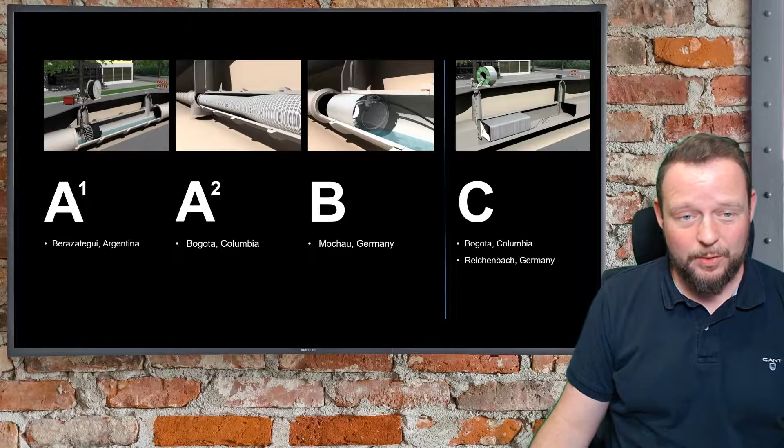And this finally brings us to our case studies about spiral wound lining technologies. And we do have 1, 2, 3, 4, 5 case studies. So for all different types of spiral wound lining technologies, I can give you at least one case study. There will be also some videos, but also some information from my side.

So let's start with A1, where we had a project in the province of Buenos Aires in Berazategui, I don't know how to spell it right. The pipe itself is about 120 years old. It's a circular shape with different diameters, but 2286 was one of the bigger diameters, and the total length is 600 meters. The liner ID chosen is 1800 millimeters.

So there was a HDPE liner installed with the Sekisui SPR-PE technology. And the host pipe condition class according to DWA is A3, since the pipe was already partly collapsed. And we also had a very high water level during the lining works. So these are somehow the big features of this project.

Regarding the hydraulic capacity, we had the flow capacity of the host pipe of about 11.3 cubic meters per second to about 14.2 cubic meters per second. This different flow capacity is because of the different diameters of the host pipe from 2100 to 2286 millimeters. And after the rehabilitation, we do have an increased flow capacity of 16.6 cubic meters per second.

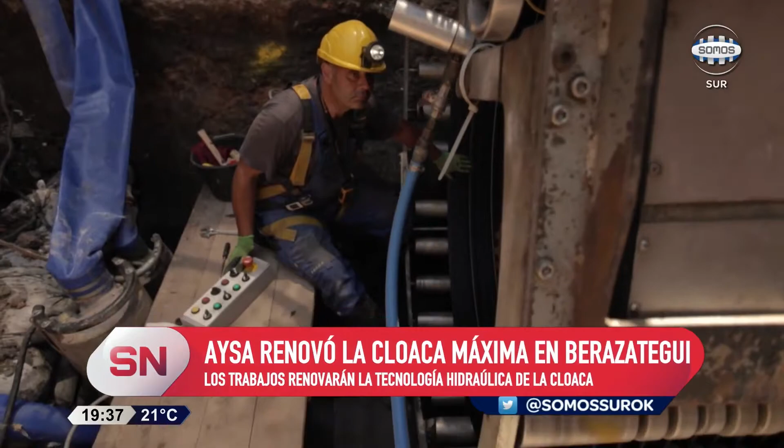And now the video of the construction company Forever Pipe.

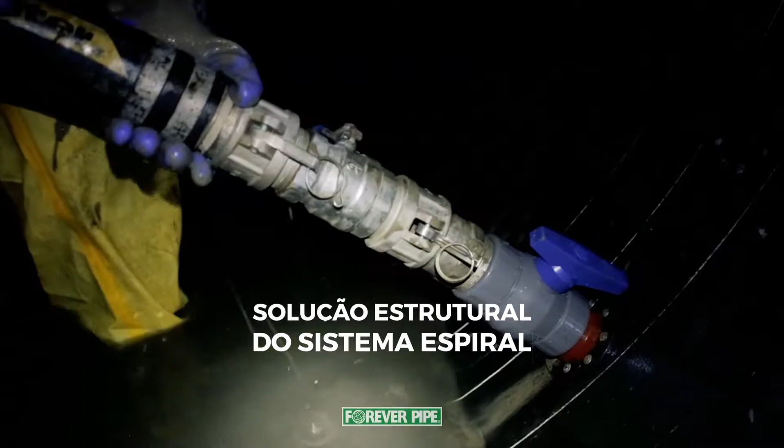This brings us directly to SWO lining technology of the group A2. So there we have a project in Bogota, Colombia. It's a circular shape where we had host pipe diameters from 200 to 550 millimeters. The total length of this project is about 23,775 meters. We had or have host pipe condition classes from A2 to A3.

The project is still running, and the depth of the invert is about 2 to 3 meters. We have soil and traffic loads to be considered, a groundwater level roughly 1 meter above the pipe crown. And the features of this project are the heavy damages, the sedimentations, the water level. So in some parts of the project we have nearly no water, and in some parts we have a very high water level. So this was and is still a tough job to rehabilitate.

The flow capacity of the host pipe prior to the rehabilitation was 0.021 cubic meters per second, and after the SWO liner is installed, it's about 0.036 cubic meters per second.

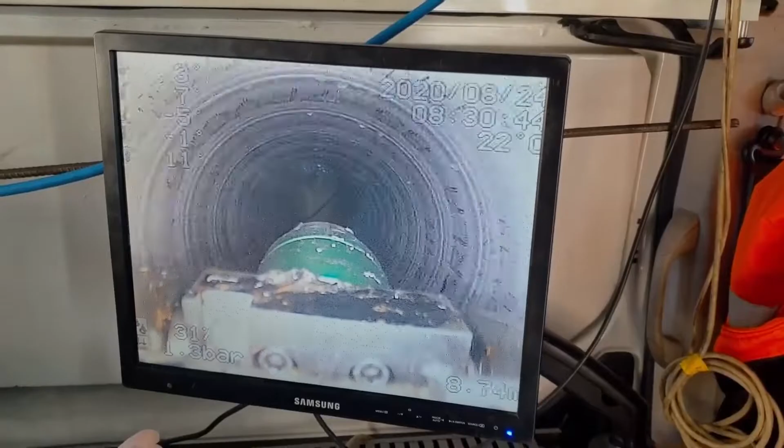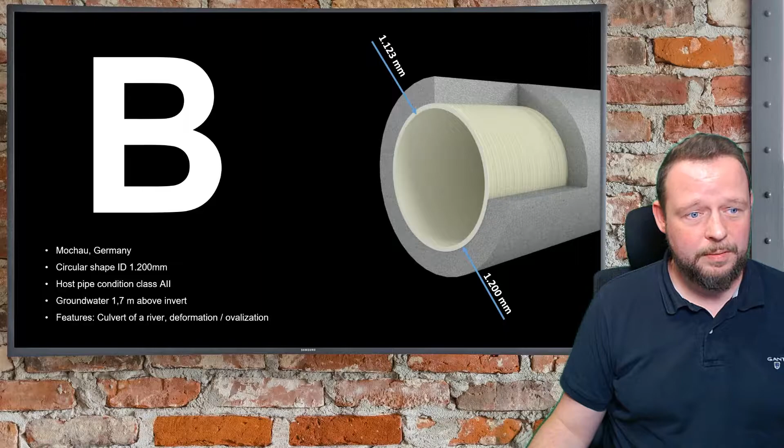And this brings us to the spiral wound technology of the group B. There we have a project in Germany, in Mochau. The host pipe is a circular shape with ID of 1200 millimeters. The host pipe condition class here was A2, so it means big cracks but not this big deformation. The groundwater level was considered at 1.7 meters above the invert. And the features of this project were it is a culvert of a river, so it means river piping, and we had many deformation and ovalization inside the pipe.

The length, since it's only a culvert of a river, was just 30 meters. And also here we'd like to talk about the hydraulic capacity: before the rehabilitation with spiral wound lining it was 2.54 cubic meters per second, and after the SWO liner was installed we had an increase of the flow capacity to 4.25 cubic meters per second.

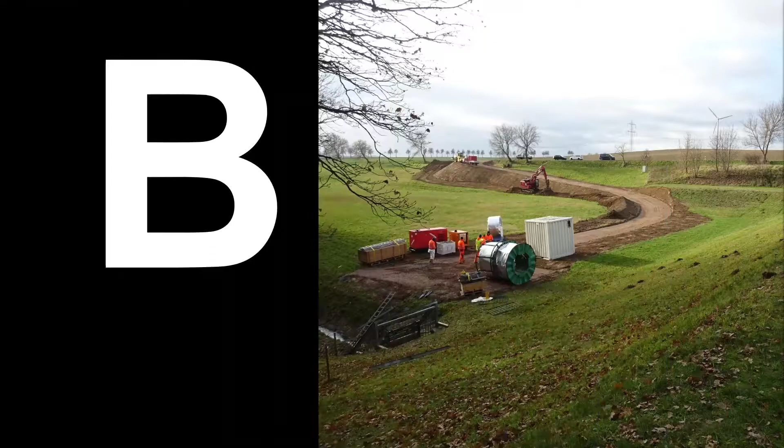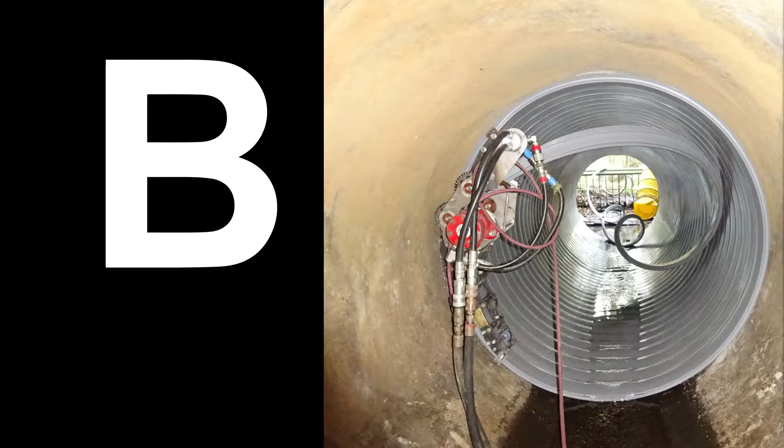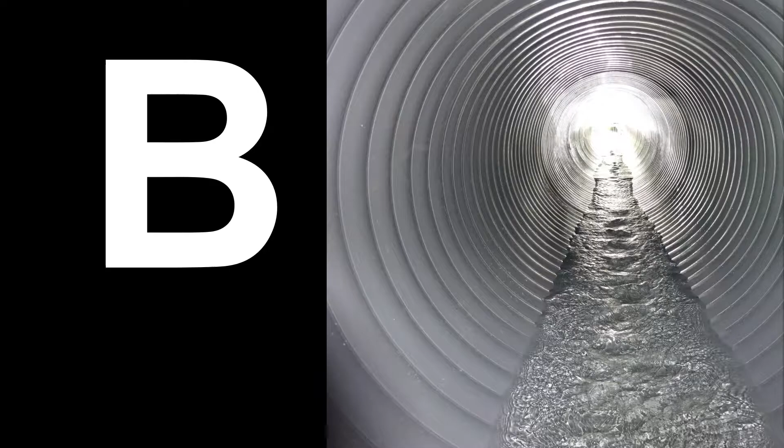Also, I'd like to show you some pictures of the site setup. As you can see, the access to the rehabilitation section was not this easy, but with spiral wound lining nearly everything is possible. And there you have a photo of the winding machine, and the profile is fed from behind. The machine runs through the pipe and winds the PVC profile directly to a close-fit liner, and this is the final pipe. And I have prepared a little video of this project as well.

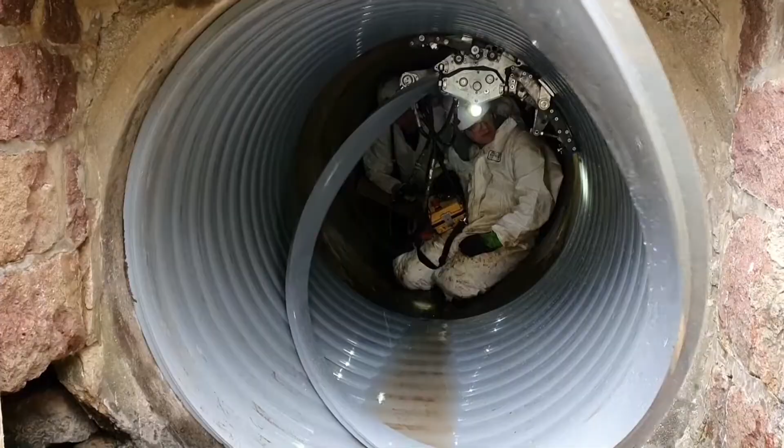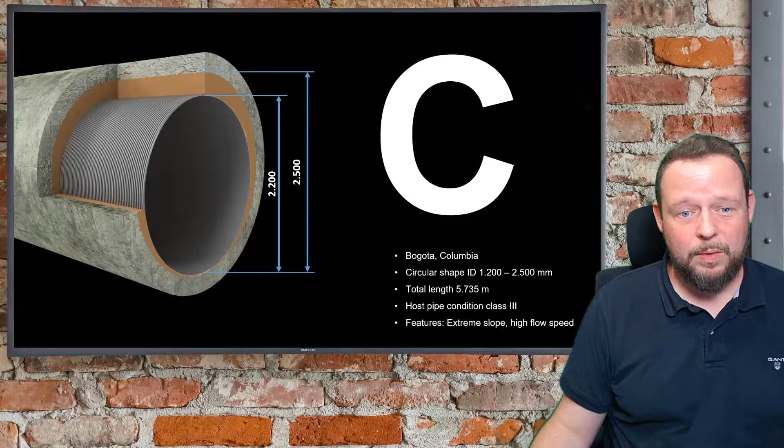Yeah, then finally going to the spiral wound lining technologies of Group C, where we have another case study from Bogota in Colombia, a circular shape again. There the diameters were from 1,200 to 2,500 millimeters. The total length of this project is more than 5 kilometers, nearly 6 kilometers. Host pipe condition class is III according to DWA. And the features of this project were extreme slope in some parts of the pipe and a very high flow speed of the water.

So also here a hydraulic comparison. We had the flow capacity of the host pipe of approximately 7.5 cubic meters per second, and after rehabilitating with our SWO lining technologies, we had an increase to 12.64 cubic meters per second. What you see here is a picture of the whole project, so it's quite long.

And these are some pictures of the winding process, where you see that in these bigger circular shapes, we also use such a guide frame where the machine is guided. This gives some more stabilization to the lining process, to the machine itself, and is typically tailor-made for each project. So such a guide frame would be used, of course, also for non-circular shapes.

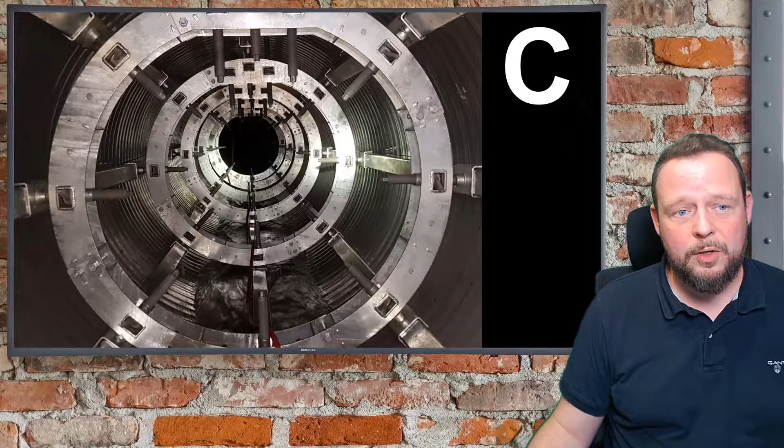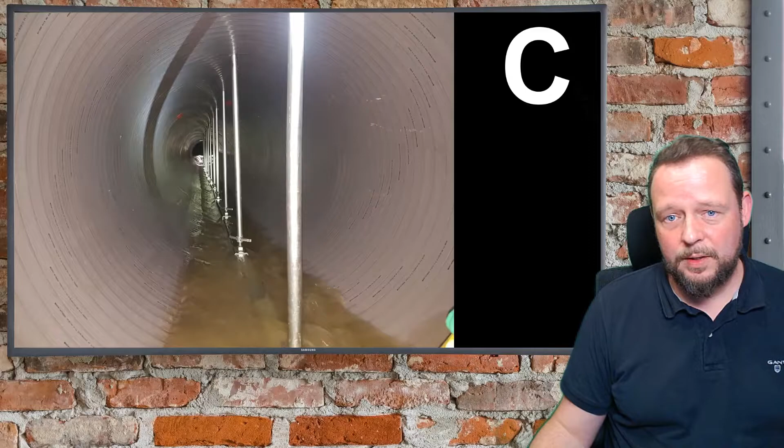And in the next picture we see a bracing system for the bigger circular shapes to protect the liner against deformation and buckling, and also against flotation. And if we have, for example, a smaller diameter, we just use such simple float protections. So there's only a beam in the bottom of the pipe and some simple float protection installed to protect the liner against floating during the grouting works. This pretty much depends on the size and how many layers of grout you use. We discussed this already. And also some pictures of the site setup.

So this now is the grouting process, where typically the most space is needed. So quite good. So also there we have a little video. The video was originally a 360-degree virtual reality video, but for our presentation I tried to make a 2D video out of it. So I hope that I covered it well, that you see everything at the right place. And let's go.

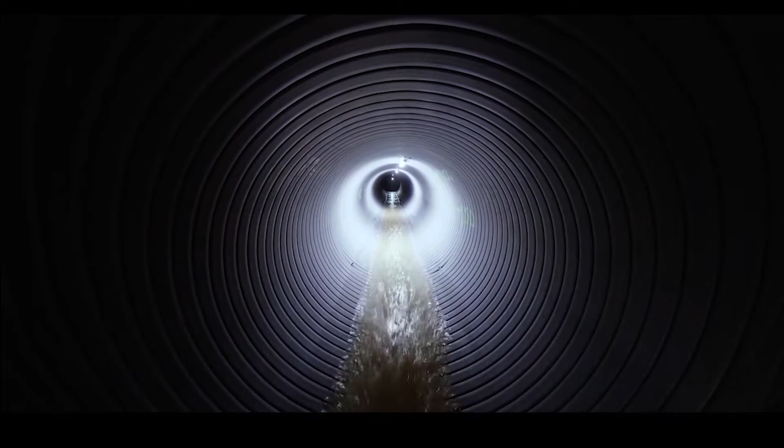And as mentioned, also another case study for the SWO lining technology from Reichenbach in Germany. So there we had to rehabilitate a mouth shape with a width of approximately 4 meters and a height of 3.2 meters. The host pipe condition class here was considered as III according to DWA.

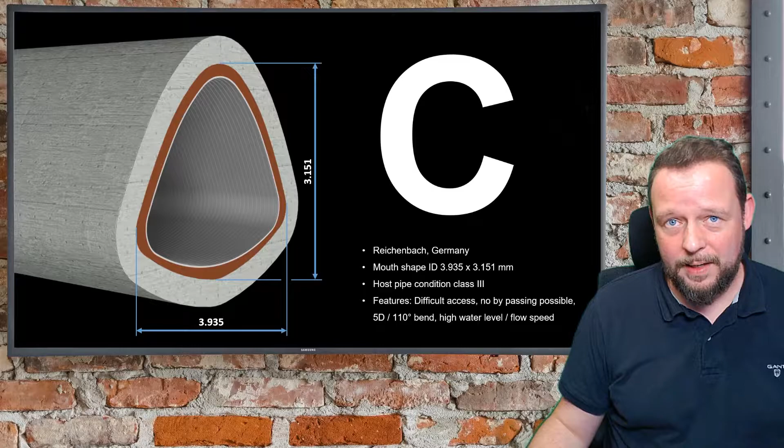And the features were a very difficult access, what you will see in the video as well. There was no bypassing possible, no overpumping possible, and we had a very, very strong bend of 5D, or let's say 110 degrees. High water level, high flow speed, a hard and tough project, but a nice one as well.

Also here the hydraulic comparison: flow capacity of the host pipe prior to rehabilitation was approximately 20 cubic meters per second. And the flow capacity afterwards, when the lining with the SWO liner was finished, is approximately 26 cubic meters per second.

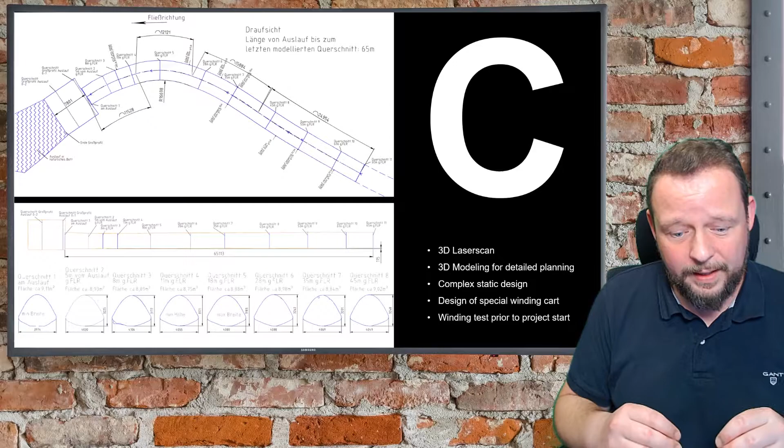So also in Reichenbach we did a 3D laser scan and used the evaluated data for making 3D models for detailed planning of each work step. Also a very complex static design. We heard this before in the sample for the static design. So it is very important for such big shape projects that every work step is really planned in detail prior to project start. So the more you plan in advance, the better the project will run.

So we also had to design a special winding cart, since the machine is very, very heavy in such big shapes, and you will see it in the video as well. And we also did a winding test prior to the project start, where we tested the winding cart and also the winding machine with the profile, with the guide frame, which was tailor-made for this project.

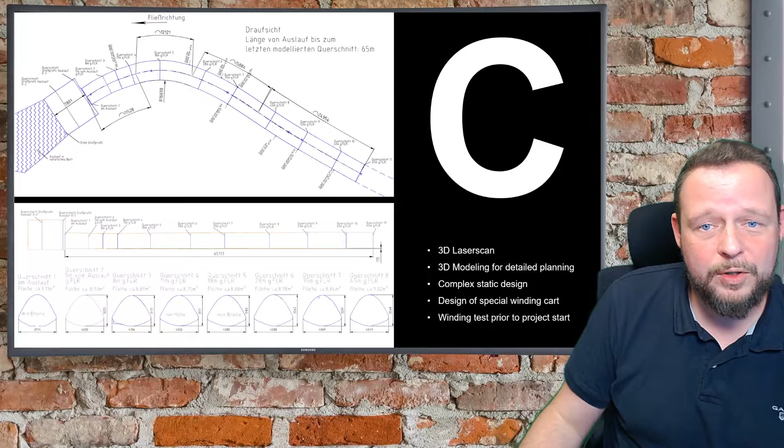And in this picture you see the liner design, this one a little bit bigger for you as well. We had to install a steel reinforcement, as you can see. This is because of the condition class of the host pipe and because of the regulations in the DWA. And also some concrete rails. So this is the red marked part, which was needed to support the winding cart during the winding process and to support the liner as well.

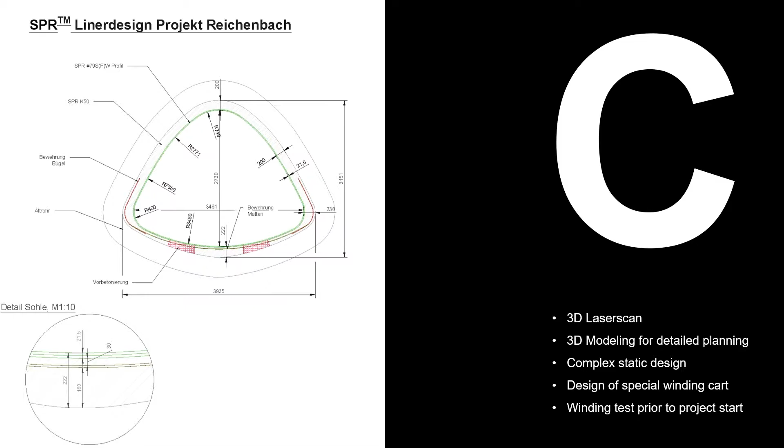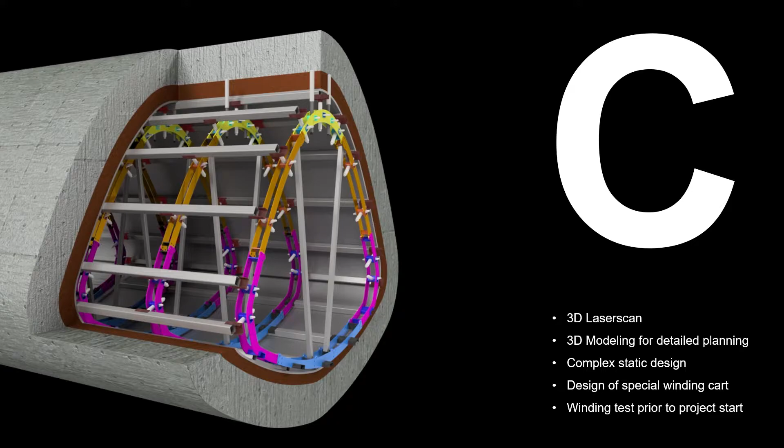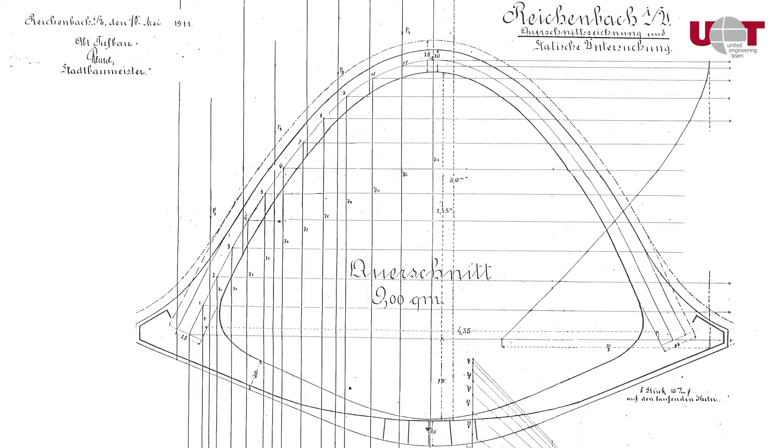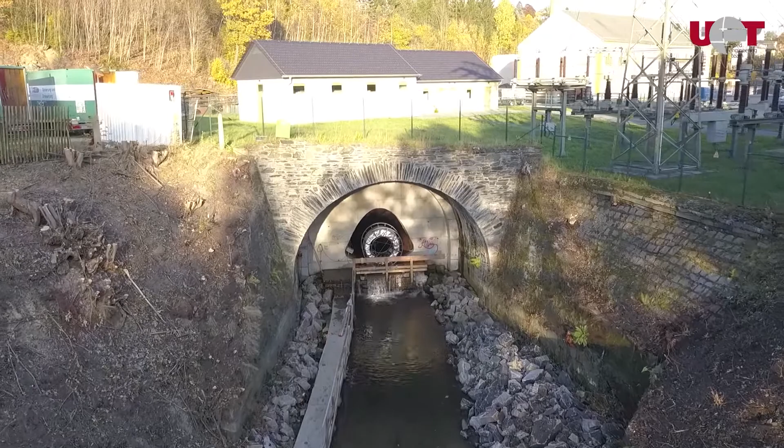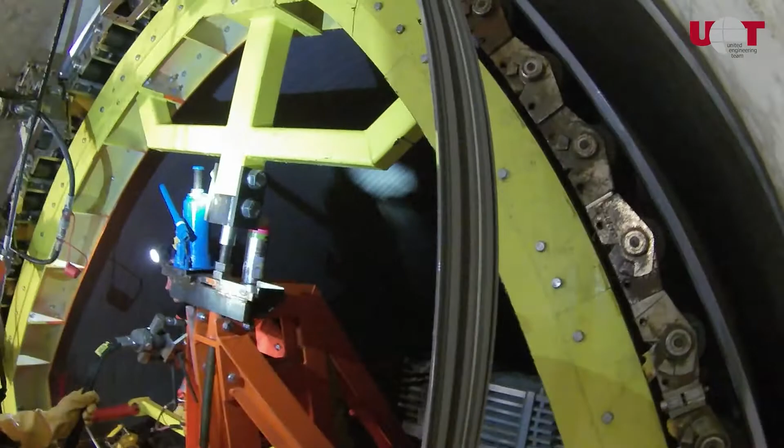And we had to make a complex static design, as you can see, using also steel reinforcement in the bottom. And then wound the liner with the SPR-TM winding machine. And there you can see this yellow one is the guide frame, which guides the machine to the shape that was designed. And also we had to use a so-called winding cart, which holds the winding machine and the guide frame. And there you can see the 4 gearboxes used. And this all was done even under live flow conditions, so the machine is able to work in live flow.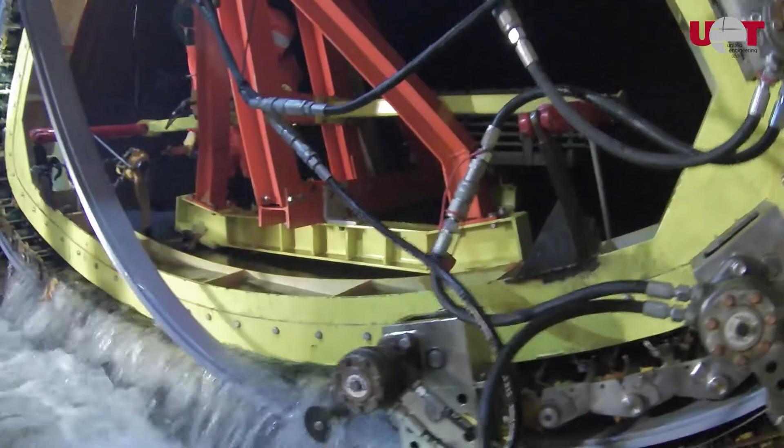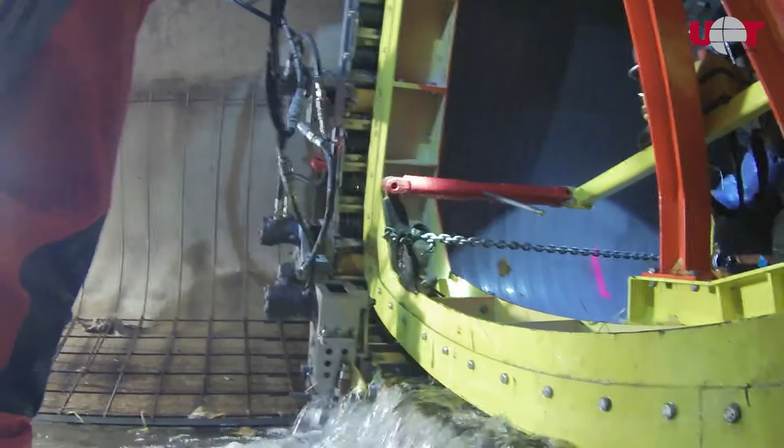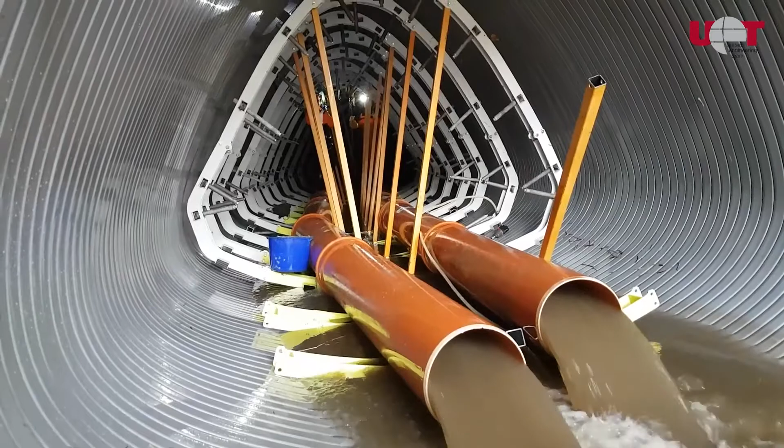And as mentioned, we had to install steel reinforcement prior to the winding, and also some concrete support ways for the liner to be placed on. Afterwards, the designed bracing system was installed to bring the liner in shape, to protect it against deformation and also against flotation. So 2 float protections were installed.

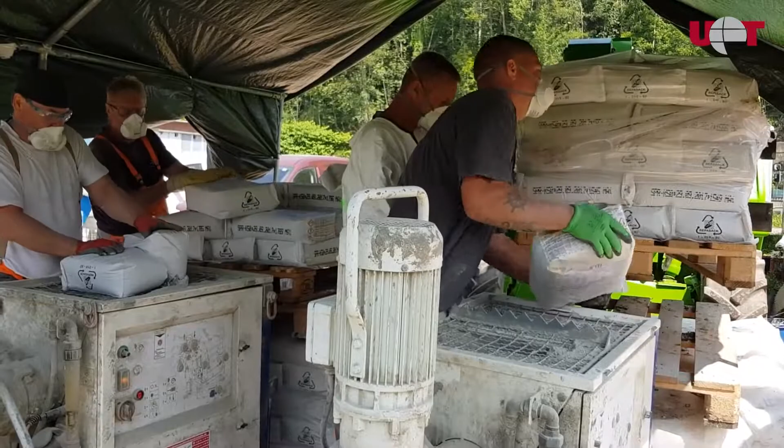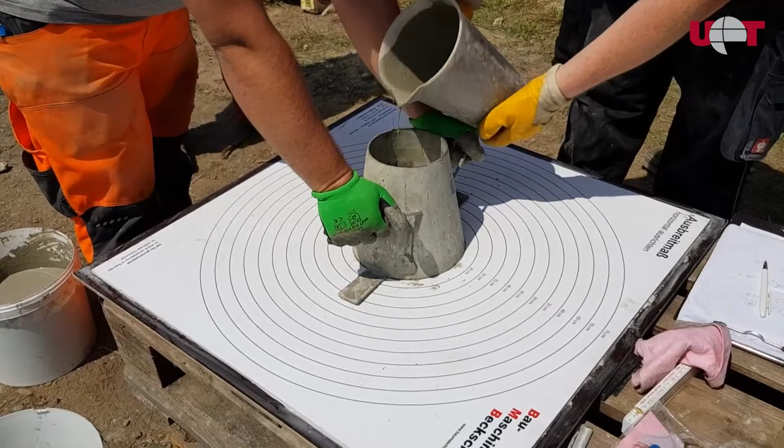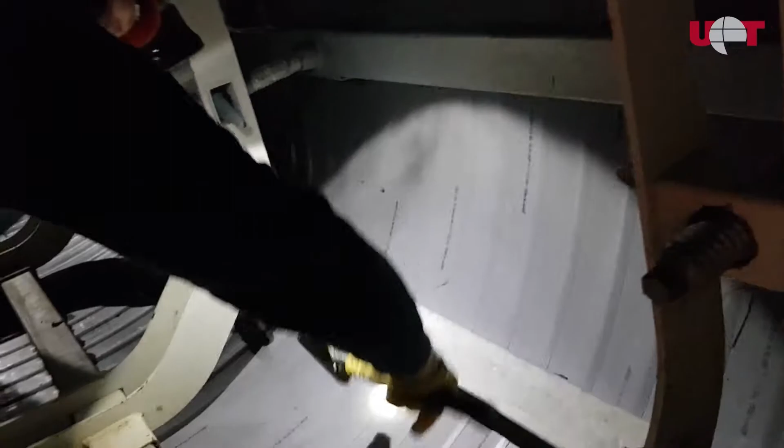And finally, the grouting process took place, where we used high strength concrete with 2 mixing units. And as you can see, it's a highly fluid concrete, which was installed in approximately 7 layers. So 7 days of continuous grouting, layer by layer. And there you can see the knocking test, which is typically done. That means this one is hardened, fresh, hardened, and even no grout backfilled. And this was our Reichenbach SPR-TM European record project.